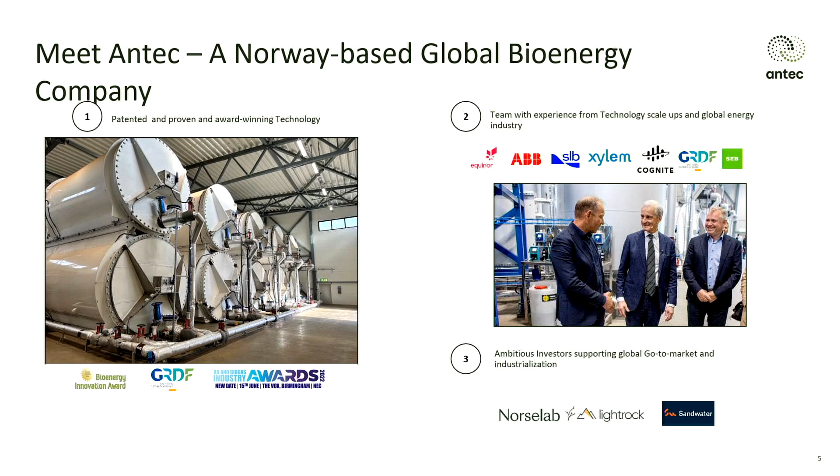What we are claiming, and I will hopefully prove some of it today, is that it's circular. We are producing biomethane as energy. That is the easy part. Then we can take out the carbon dioxide, and we can upgrade it to brewery quality, and you can have it in your beer or in your soda.

But you're also producing biofertilizer, and that has become a huge product nowadays. The fertilizer price has increased. I heard in the UK you're shutting down the fertilizer plants due to the high gas prices. The artificial fertilizer that you can buy uses methane to produce the hydrogen, to produce the nitrogen, and so on. This can also be part of the solution for increasing energy production in Europe, or decreasing the energy usage in the agriculture industry.

We are efficient. We have a retention time in the digester of down to 8 days on the 4 plants that we have today. That is up to 5 times faster than you have on a traditional CSTR, unless you have some kind of pre-treatment that speeds up the process. It's sustainable, quite obvious, and it's profitable as well. They can compete with the traditional CSTR plants that we are building today.

And we're also able to build it closer to where the waste is actually happening. Where do you have the waste? Because you can put it close to where people are living. The plants that we're building are more or less odorless.

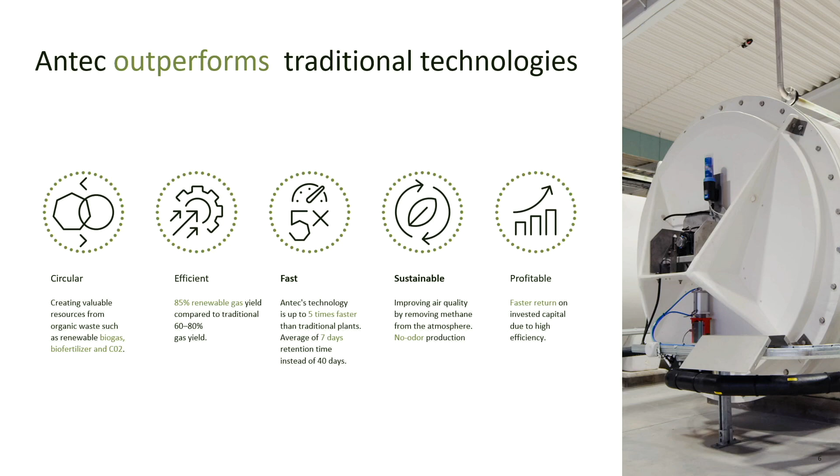The results. The technology that we have is a biofilm. Biofilm is the same as you have on your teeth in the morning. You have plaque. That is a biofilm. You're removing it because it's producing acid and it tears down your teeth. You have biofilms all over in nature. You have it in the bathroom if you're not washing it, because bacteria grow wherever.

We have an inside architecture that promotes the biofilm to grow. That is opposite from the CSTR technology that has an inside that prevents the biofilm from growing. Biofilm produces acids. That is what the bacteria do. They are tearing down in a hydrolysis process.

The first step, big molecules. You take the potato, you mash it down. That is pre-process. Then you have the hydrolysis breaking down the long molecules. You do the same in your stomach. That is the first part of our plug flow.

In the plug flow, the reactor is divided into different chambers, and each of the three processes, the hydrolysis, the acid production, and the methanogenic process, happens at different stages of the reactor, and that we can monitor. We are measuring the bacteria communities, and you can see that we have the hydrolytic bacteria in the first phase, and we have the methanogenic bacteria at the end phase.

But you have them all because they are interconnected, so it's not only the hydrolytic bacteria. But that is our process, and the reason we can speed it up is that we have a high bacterial density in each of the phases.

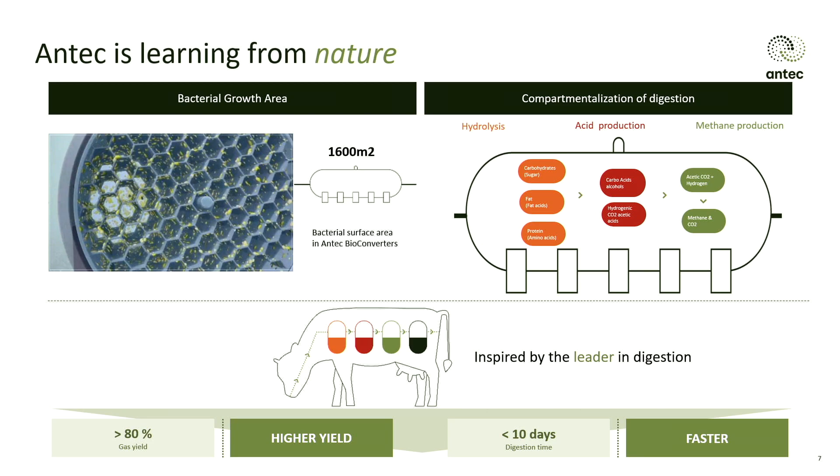So that is why we can run the process fast. We can speed up the first process, which is traditionally slow. We can take out the bacteria to pre-treat the substrate, increasing the energy yield or the energy content of the substrates. And the rest of the process is very fast, but you need the bacteria to be there. And since they're growing inside, we're not diluting the system. So that is the key of our technology.

We have recently had a due diligence report on the company performed by Ramboll, and I will show you the background for some of the results that I'm claiming, or they are claiming or writing in the report. In this talk, I will focus on the feedstock and on the biogas yield when it comes to the performance, because that's important. You're earning money on the biogas. You need it to be fast. But also, how do we deal with the problems, impurities?

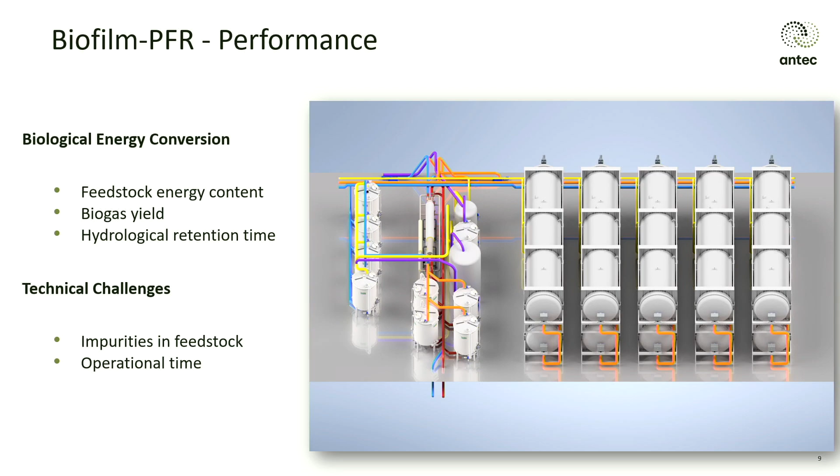For instance, food waste. Food waste is not a problem in the biogas sector. It's what comes with it, the plastic bag, the metal, whatever. For those of you operating those kinds of plants, you know what I'm talking about. And sedimentation of the CSTRs. In Norway, they empty all the CSTRs every 2 to 5 years due to sedimentation problems. We don't have that problem due to the architecture. And I will show you the operational time from 2 of the biogas plants that we have in operation.

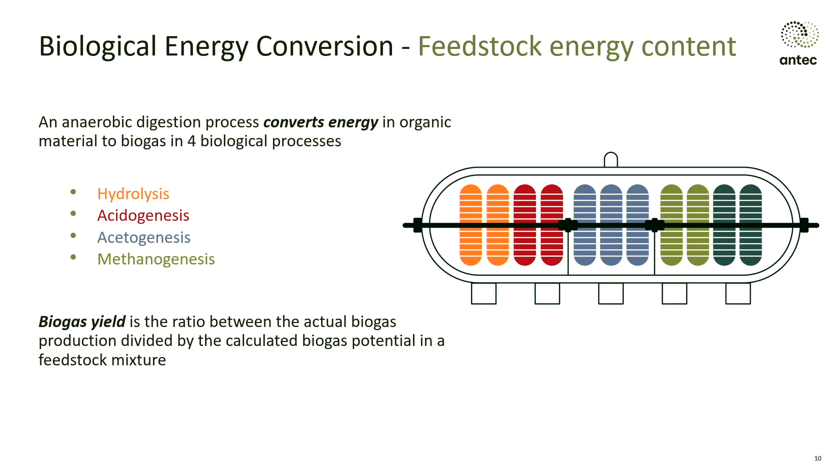So just for those of you who are not familiar with the terminology, the phases are hydrolysis, acidogenesis, acetogenesis, and methanogenesis. Those are the processes that you need, regardless of technology. Those are the processes in the AD systems. Those are colored on the picture to the right side, where they occur. Then there's another term, biogas yield. The potential of the substrate you're using is the maximum you can get out. You take the actual production and divide it by that, and that is the biogas yield, just so everyone follows.

So, a project always starts with a graph on the left side. You do the biomethane potential or the biogas potential. There's a standard method for that in the industry, and everyone does that. How much energy can I get out of the feedstock that I'm using? On the graph, we have fish silage, that is dead fish from the fish farming industry. You have the blue one, which is food waste, and the red one, which is cow manure. Cow manure normally contains low energy. We can increase that, and I'll show you some graphs of that, but this is how you start.

But on the right side, you have the true story. What happens when you start operating the plant? You will see a huge difference between the different feedstocks. You're not able to do all those analyses before you start the project or build the plant. And we are now investigating: can we utilize the advantage of having separate bacterial cultures in the digester to increase the feedstock energy?

Because the bacteria need the energy as they want. If you're eating acid, you need the acid. If you're eating the polysaccharides, sugar, whatever, you need the sugar. Can we increase that in the feedstock? Because that will lower the variation in the energy content. And variation in the biogas industry is the worst enemy.

You want everything to be stable, because you have a gas upgrading system that doesn't tolerate variations or is bad at tolerating it. And the operators, they want to know in the morning, what will I expect? Looking at the screen, are the figures as I expect? Then you can calculate very easily. But you need to monitor it, that's quite important.

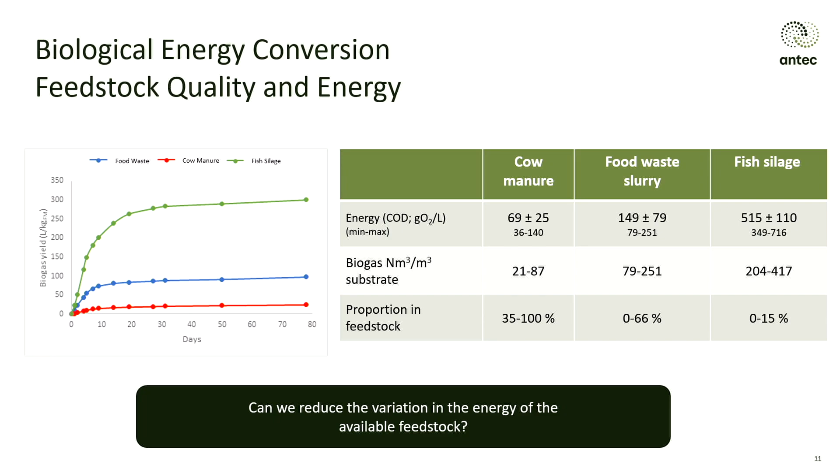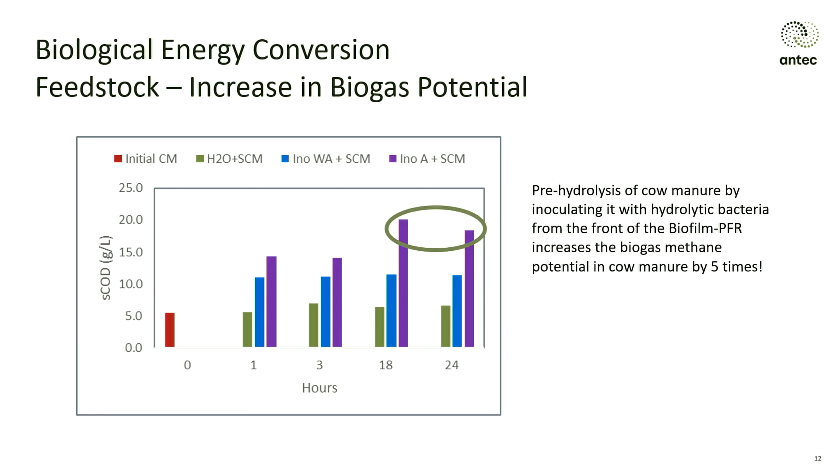And that is speeding up, because this is time consuming. At this time, on this graph, 18 to 24 hours pre-treatment, less than a day, then you can increase the energy of the feedstock that you're putting into the AD process. That is not possible with other technology, because you need the bacteria community. But this is how we can speed up and increase the biogas yield.

Then we're moving to the biogas yield, and the blue part is the biogas production at the biogas plant that we're operating at the moment. And there's been some variation. This is for the last 7 months. The green line at the top, that is the biogas yield. And as you remember, it's the actual production divided by the potential production based on the methods that we are using in the industry.

We had a problem on the biogas plant. You see that there was a fast increase at the beginning, and everything went okay, but the yield was low. The biogas yield was extremely lower than we expected. It was down to 40-50-60%, that's the bar on the axis on the right side. And we couldn't understand why. Then we started monitoring. We analyzed all the parameters that you do in the biogas industry, and we found the reason.

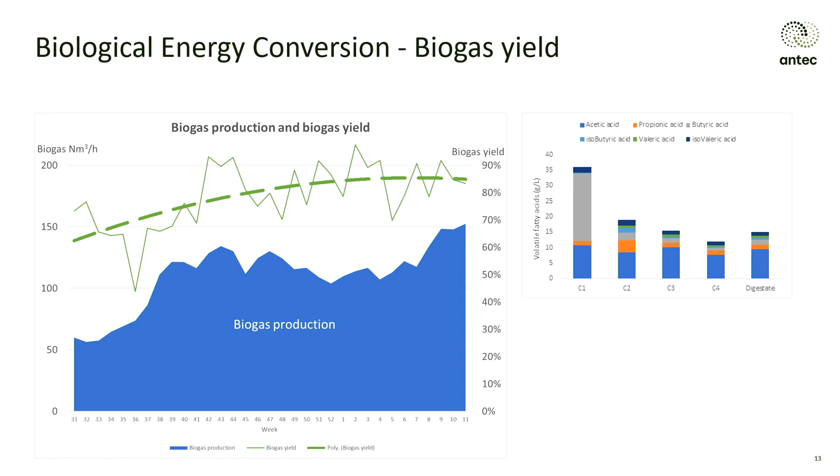And for the plug flow, I forgot one, sorry. On the right side, that is the acid concentration of the different chambers of the digesters, and you see that it decreases. A lot of people are claiming that these are just small CSTRs, but it isn't, because then everything would be equal inside. So the chambers that we have moving the substrate forward actually work with the different bacteria that we have.

So this is the biggest plant we have. It's in Renevo at Stord. It's the west coast of Norway, close to Bergen. It's a 40 gigawatt-hour plant, and they have 10 converters working today at a hydraulic retention time of 10-12 days. But they are still in the ramp-up phase, because you need the bacteria to grow and develop with the stages that you want.

The energy consumption on one reactor is 0.6 kilowatts. And that is very, very low. Pumping biogas substrates normally requires 1 to 3 kilowatts per pump that you're using. So the energy consumption is low, producing high yield or high energy biomethane. That is important. Now the product is of course biomethane, liquefied at this plant. You can do compressed, or you can use it as you want. They're also producing carbon dioxide, and of course biofertilizer for the agriculture market.

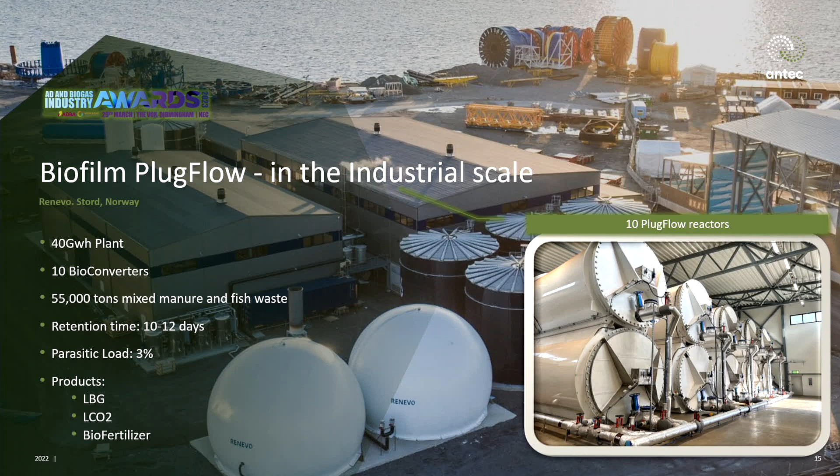And then the maintenance. I guess some of you have been working on biogas plants doing the maintenance. That is quite a tedious process, and it costs enormously. It costs downtime. You're not producing, but you have to do the job, and you have to get the spare parts that you need. For 2 biogas plants that we are running today, they have a downtime of 2 days during the year. They have an uptime, production time, of more or less 100%, and that is quite unique. In Norway, we normally target 80 to 85% production time. Then you have a success.

In our case, the maintenance is very, very low. And the reason for that is that we're avoiding everything that goes fast. Every pump that is spinning fast, we take out. Everything goes slow. Because you have sand, you have glass, you have all kinds of wear and tear on the process. That is avoided in our digesters. The second thing is that we don't have sedimentation problems, luckily. So we don't have to stop the plant. But we have only been operating for 1 year, and if you remember what I said, they have to close down a digester every 2 to 5 years. In Norway, that is quite normal. So how can I claim that we don't have sedimentation problems?

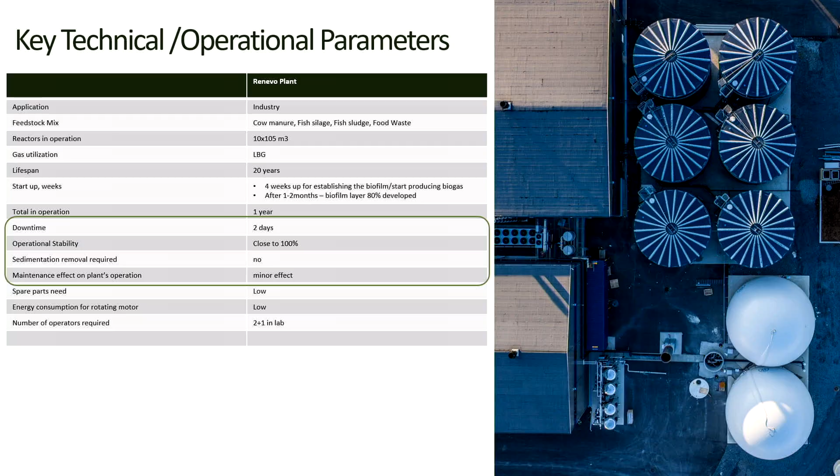If something happens and you have 10 converters, you can shut down one and you can still operate 9. So if something happens and you need to open it, well, you can do it, but you're still running at 90% efficiency of the plant, because the others can still produce. And of course, the stirring ensures that there's good contact between the substrate and the bacteria film growing on the surfaces inside.

My example is one of the smaller plants, one of the first ones we had. They are processing 10 to 12 tons of food waste delivered by a truck every week. According to the Norwegian numbers, 5 to 10% is plastic and light impurities. Those are floating, not sedimenting. The other 5 to 10% is heavy particles going to the bottom. And those are the ones creating problems for the digesters.

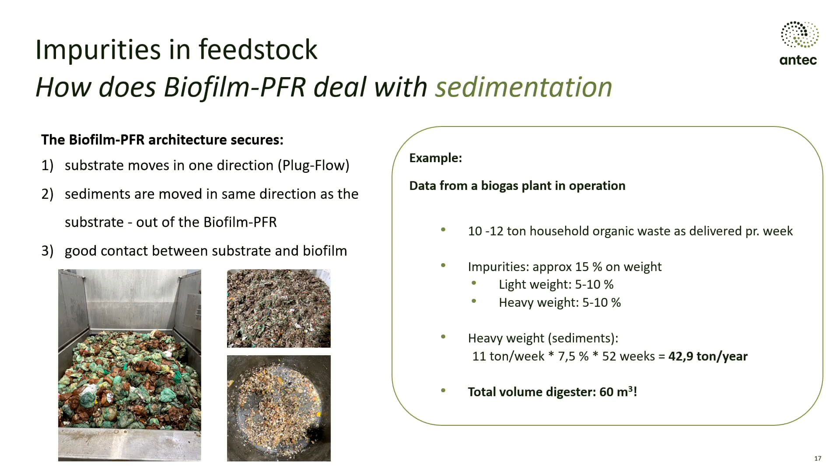So, what are we providing as a company? We would like to build, own, and operate biogas plants. That is our main target, in partnership with those owning the substrates, because there will be a competition for substrates. You need to have contracts on it. That is our plan. But we are standardizing our product.

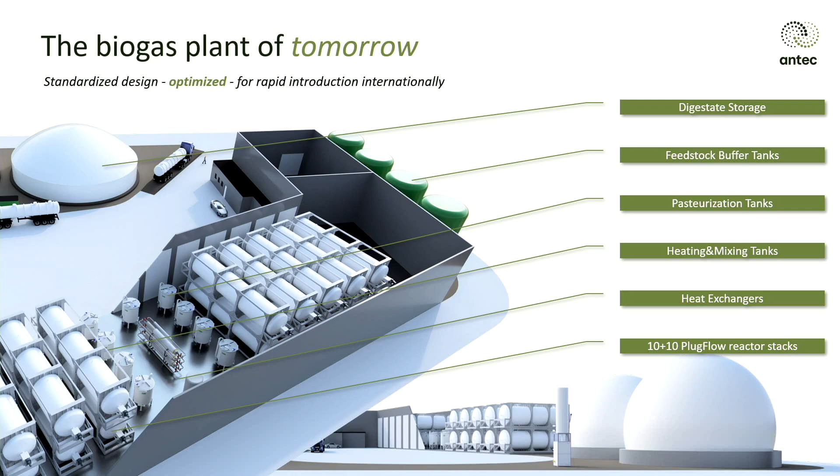So this is one of the plants being constructed today. We are in the process of building 2 new plants. It's standardized. Everything is pre-made. It comes from the factory as it's supposed to be, full, and you just have to connect it. You have to build a pipeline at the biogas plant.

The building is standardized. You have different models for it, depending on the size you would like to put up the biogas plant, so you can shape it differently. And that hopefully will reduce the cost of biogas plants by 40 to 50%, because most of the cost is actually on the digesters. So this standardizing process is going on. If anyone is interested, I can put you in contact with the sales team on our side.

Then we have the industrial production. Everything's modular. The company producing this has 2 production lines. They can produce 1 complete digester per week per line, so 2 digesters per week. But this is a multinational company, so wherever you would like to put up the plant, you can build the digesters at the closest factory there. And at full capacity, they can produce 20 digesters per week. That is fairly fast. And there's nothing going on at the site other than preparing the area for putting up the digesters.

The second thing we're doing is artificial intelligence. We need to collect data and help the biogas plant operate at maximum speed, because that is what you earn money on. You have to produce with every hour you're putting in and every substrate mixture you're putting into it. So we are modifying our process steering system, and we can monitor it from abroad. My group of biologists and experts in AD processes can help the biogas plant.

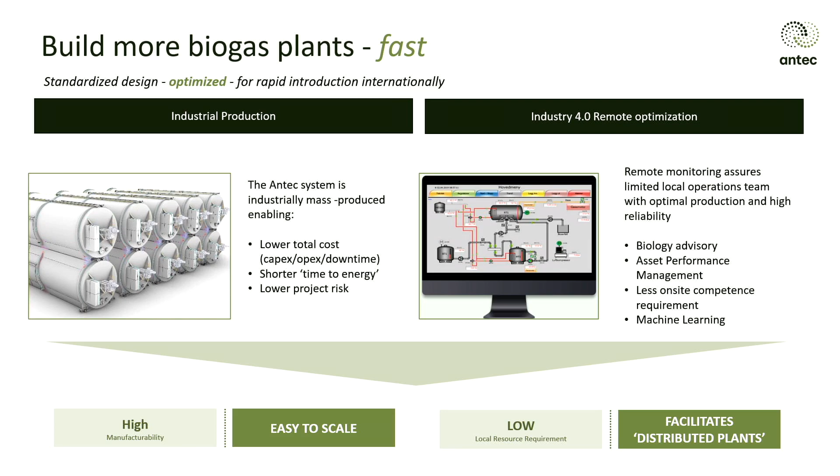So you don't need a lot of experts on the plant. You can size it yourself. But of course, large biogas plants will need to have some competence at the site. That is important. So this is what we are thinking about now. This is one of the projects.

We have Salmar, one of the biggest fish producing companies in Norway. And we have Columbia Farms, producing salad and vegetables. They're merging together, putting the biogas plant in between, so they can utilize the digestate for plant production. We can utilize the fish sludge from the salmon farm production at Salmar, and we can use biogas for transport.

In Norway, we don't have a gas grid, so we have to liquefy it and get it down to the European market. But that is a special thing for Norway. If you have a gas grid, that will be much easier.